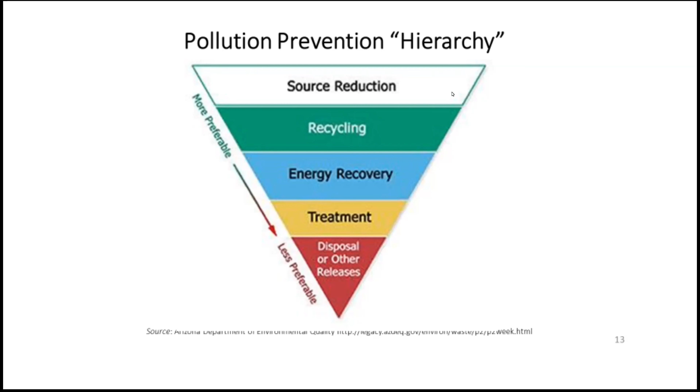This is the infamous upside down hierarchy for pollution prevention. And the concept is that while 20 years ago, 25 years ago, we were all focused on the bottom of the pyramid, how to dispose or deal with the releases or other emissions, the concept is to be working on source reduction. And in this case, in terms of water, how to actually reduce the amount of water that we need to use in a particular operation or process. And one of our themes has been that pollution prevention is a business strategy, particularly in these challenging times.

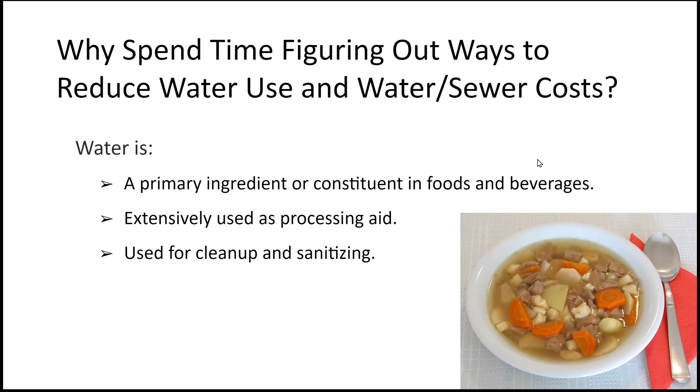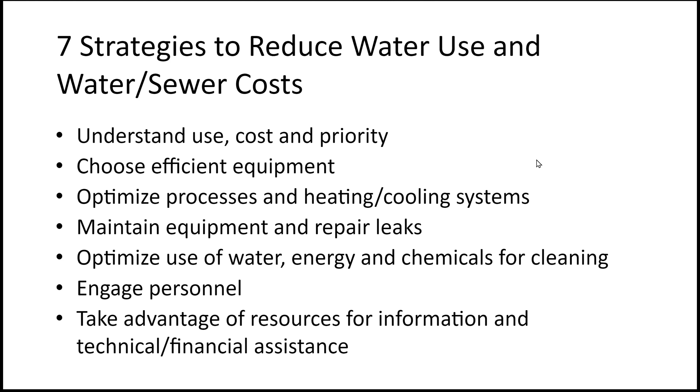We have 7 strategies that we are going to talk about to reduce your water use and water and sewer costs. As we talked about last month, understanding your bills and your consumption of any resource is always a good first step. And water efficiency is an important component of sustainability, but people are busy and they need to prioritize their efforts. So if you are just getting started with your sustainability efforts, I recommend looking at your water and sewer costs in relation to other resources such as energy, and then prioritizing where you will start your efforts.

Your water utility measures your total water use with a meter coming into your facility. But if you want detail on where water goes within your facility, there are sub-meters that can be installed to measure the flow of water to different areas.

And doing something weird. On the next slide, I'll show some graphs that give you an idea of the typical breakdown of water use within restaurants and food processing facilities.

Actually, Madeline, can you, sorry, go back. I wasn't done with that one yet. Sorry. It's okay. I'm up to 5 now, blips on my part, thanks.

One other thing to think about when you are reviewing your bills is that in some facilities, the flow out to the sewer system is not directly measured. Instead, the utility bases sewer costs on the volume of water flowing into the facility under the assumption that the input and output are basically the same. This is not always accurate, especially in food and beverage facilities where some water may go into the products.

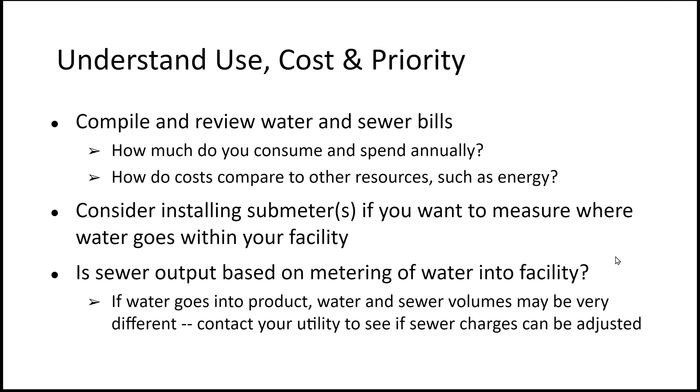A lot of the equipment in food and beverage businesses use water, and some models use it a lot more efficiently than others. So when selecting new equipment, one consideration should be how much water it uses as well as energy. And now we are going to hear from Cynthia with the New Hampshire Pollution Prevention Program, who has an example of where this has been something worth looking at.

Thank you. And again, thank you to Madeline for asking me to share some of what we've learned. Our program is on its second of a 2-year grant from the EPA to work with the food and beverage manufacturing industry. And we have been specializing in breweries and craft beverage producers. And there's a mid-size for New Hampshire brewery that we were working with. And they were concerned about the quality of their beer. They actually weren't looking into water efficiency at this moment.

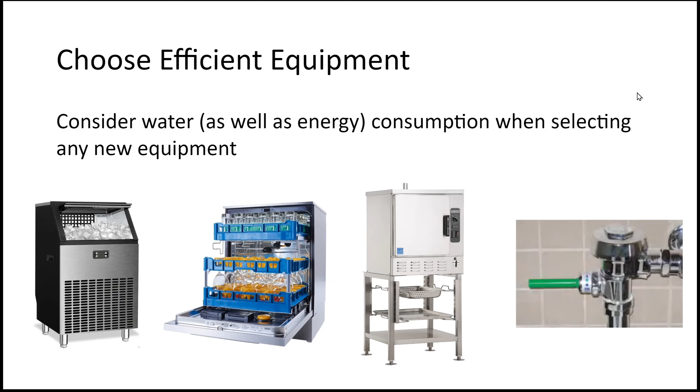Okay. And the next slide, Madeline, shows that there are smaller equipment changes that can improve water efficiency too, such as using efficient nozzles and pre-rinse spray valves and low flow aerators on sinks. If you don't know what an aerator is, this shows that it is the little attachment that goes at the end of the faucet, and you can substantially reduce water from sinks in the restrooms and break rooms using those, as these EPA graphics show. Those little changes can make a really big difference.

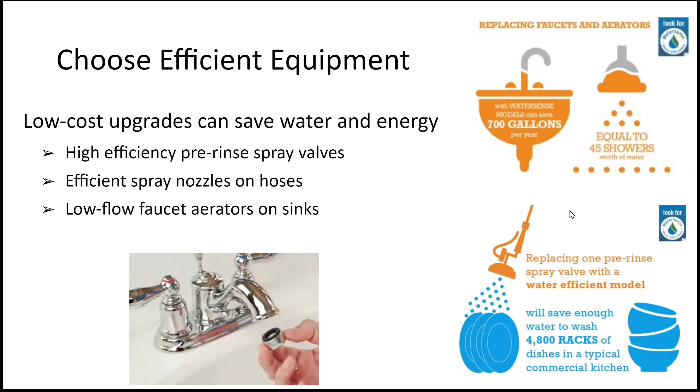And on the next slide, we talk about process modifications, which are another way to reduce water use. One example is looking at where you're using water for cooling. And single pass cooling is where the water is used once and then discharged to the sewer. Sometimes that can be replaced with a closed loop in which the water is recirculated. Another opportunity is making sure that water flows are turned off when not needed.

And heating and cooling systems use water in a variety of ways, so they should be optimized for performance as well as efficiency of water and energy use. And that is a big topic that I'm not going to get into detail on today, except to refer you to some great EPA resources that are listed here.

This guide goes into a good amount of detail on water use in heating and cooling systems. And there is also a webinar specifically on that topic here at the WaterSense website. They have a live version of that webinar coming up next month, and there's also a recorded version on there. So if you want to learn more about that, those are great places to look.

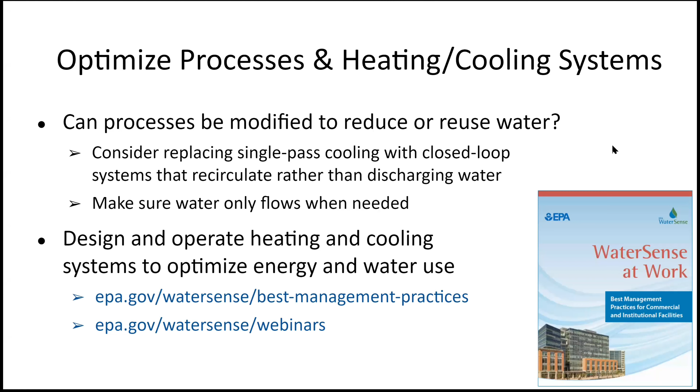And the next slide talks about maintenance. Regular cleaning and maintenance of equipment is important to make sure that it's operating efficiently in terms of water and energy and just production. And there can be a lot of water lost through leaks.

And Cynthia, I believe you have another story for us about leaks. Yes, thank you, Lauren. Again, another brewery we were working with, we were helping them to benchmark their utilities, so energy and water use, etc. And in the process of benchmarking, they noticed a sudden spike in their water use, and they didn't know what was causing it. And had they not been benchmarking, they might not have noticed that until they started to get bills that were significantly higher.

So they started to track it down. They couldn't find any leaks. They hadn't done a process change in their brewery. They didn't know what was causing the spike. Well, like so many other breweries, it was located in one of those strip malls that have shared utilities. And this particular brewery just paid a certain percentage of the monthly bill that was allocated to their water use.

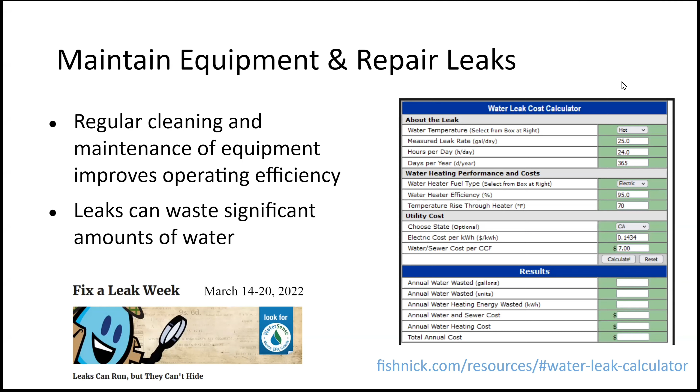Thanks, Cynthia. And now we can go to the next slide. And Madeline, you can take it away. That's for me.

So this is just a little example of the connections between water, energy, and chemical use used for cleaning. So I don't know how many of you have clean in place operations or know of companies who rely on clean in place. But this particular business, sodium hydroxide is commonly used, and they were using it. And one of the issues was that there was really variability based on the operator at the time.

So this relationship of how much of the chemical you're using, to what extent is it being diluted and how much? And then what temperature are you using? And then for what length of time? But the idea was that they started to look at this as opposed to just assuming that everything was fine and there were no additional optimization or improvements that could be made.

And UMass Lowell worked with this particular company and has worked with others to, again, review and ask the questions. One, to make it more consistent, but they found that there was a way to optimize, particularly in terms of the energy costs and temperatures, to make some adjustments.

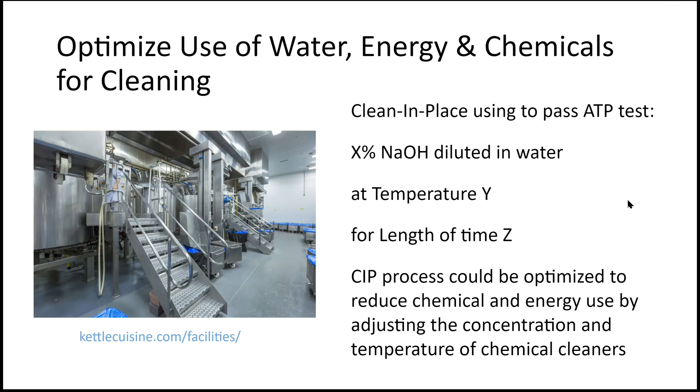And the second is a true or false little quiz here. I'd love it if you put it in your chat, but you don't have to. This is not going to be graded. But one of the strategies in looking how to reduce your water use and associated costs is really to engage your employees. So true or false? Whoops.

Everything we need to know about running our operations can be found in user manuals for our equipment. I don't understand why we need people. We just follow the directions. Is that true or false? Would anybody like to put in the chat their view of that? Next, let's see what we have here. Next.

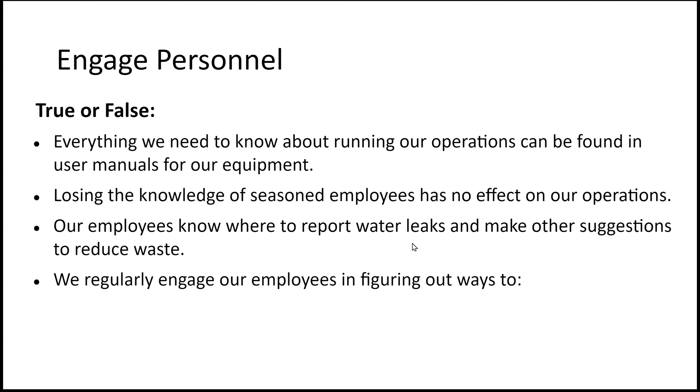Losing the knowledge of seasoned employees has no effect on our operations whatsoever. Now, I guess depending upon the employee, that could be true or false. But here we go. True or false? Our employees know where to report water leaks and make other suggestions to reduce waste. And lastly, we regularly engage our employees in figuring out ways to reduce costs, improve our operations, and reduce our environmental footprint.

The bottom line on this one is that the people who run these operations, our businesses, our facilities, can make them or break them. They know how these operate, how the processes run, and they do know the opportunities to improve, to save money, and reduce waste. And so think about just trying to have that conversation in terms of awareness or training, to look for and to feel comfortable coming forward with some suggestions.

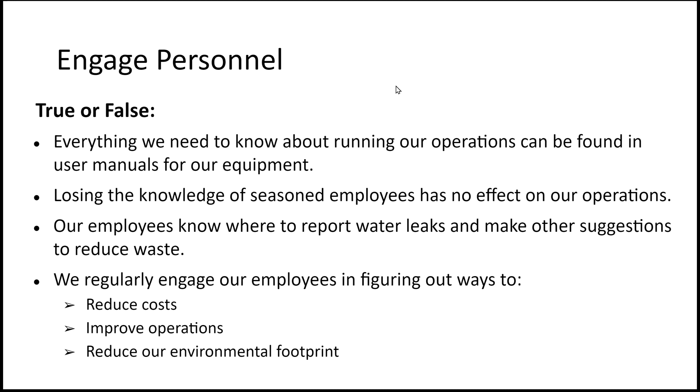I've been in places where everyone said, oh, we want to engage personnel, we want to hear from them. And then as soon as somebody actually made a suggestion, they were shot down really hard. It's almost worse to ask and then shun than to not ask at all. But anyway, think about the role of your personnel, your employees, in pollution prevention in general and in water specifically.

Madeline, can you get back a slide? Mhm. Sorry. Oops. Boy, I'm really cracking up the points.

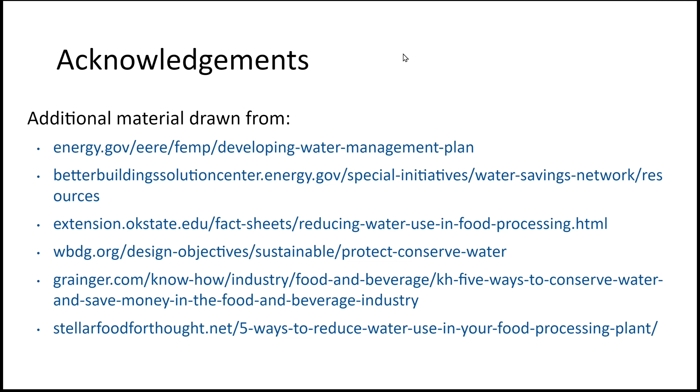And we're going to go into some small breakout rooms. I was on a webinar with a whole bunch of people from Ireland, and I just loved that he was breaking us into wee breakout groups. So we're going to go into wee breakout groups just for a few minutes. And the question really is, what have you heard so far that resonates with you, that you think, well, I'm going to try that, or I could try it, or I could suggest it to somebody that I'm working with, or that you've heard of.